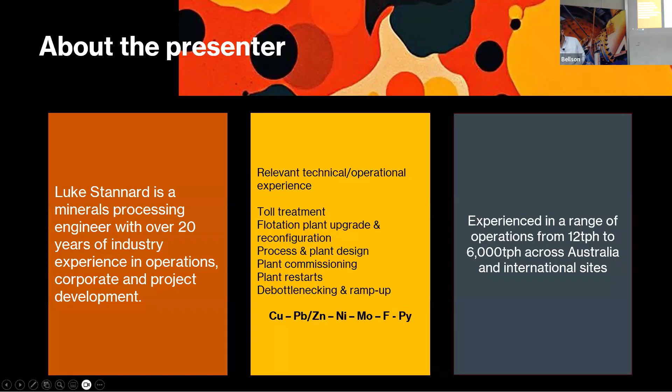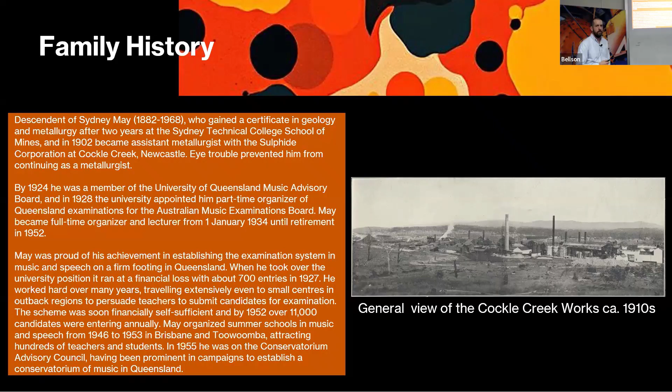And again, I appreciate the opportunity to come and talk here today. A bit of family history is that there was briefly a metallurgist in the family before ending up with an eye injury, but later went on to grow the music department at the University of Queensland. So it's held in high regard, the university here, and I really appreciate an opportunity to give back myself today.

So on the Tennant Creek area where we're working at the moment, there is basically the one group at the moment, Pan-African Resources. They recently acquired the Tennant Creek mining group, and they have an agreement with Emmerson Resources, and they have commissioned a plant this year that will treat a lot of the gold deposits of that region.

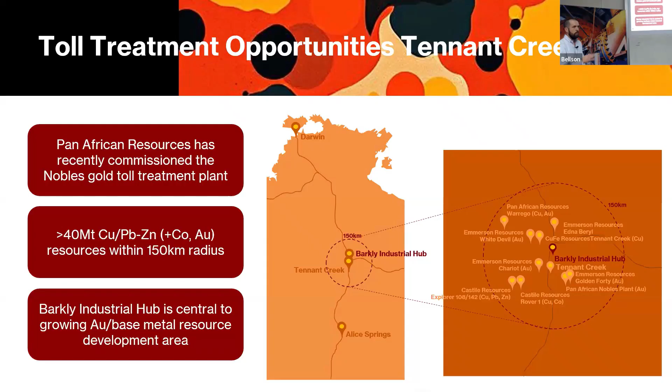Outside of those gold deposits, there's about 40 million tonnes of base metal resources within a 150-kilometre radius. And the genesis of this project, there's a gentleman who owns the Barkly Industrial Hub, situated right in the middle of that area. So this site was originally an abattoir. It's been leased out to industrial clients over the years, rehabilitated and upgraded to be an industrial site. The vision for the site is that it will become a circular economy focused industrial hub that draws on the mineral wealth of the Tennant Creek region.

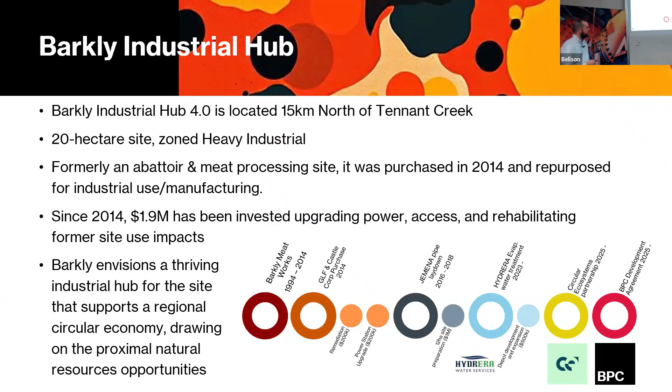And so right now, there's 3 of us working there. There's a group, Hydrera, who treat fracking water from the region. There's Circular Ecosystems, who's I guess sitting at the top layer, making sure we generate value between the groups that work at the site. So the vision for that site is aligning with the Northern Territory government's economic strategies, and it's not particularly unusual. It's the usual: create jobs where we can and leverage infrastructure that has been installed over the years.

From a mining sense, in that region, what ended up becoming part of Newmont or Normandy was Peko Mines, and they had a large area across that Tennant Creek region, uncovered a lot of copper, gold, and bismuth resources, and produced a significant amount of copper and gold over the years. Ran for I think near on 40 years, and since that time, those assets have been all split up and sold off, and there's still some tailings that have been acquired through various groups and partially retreated, and I guess remain as a legacy item to deal with in time.

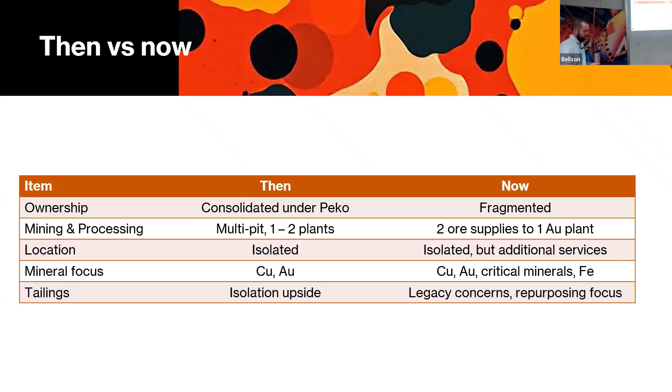There are groups that are open to other commodities. So there's been discoveries of rare earths and other critical minerals in the area. So designing anew, you can bring in some other considerations. So I guess going into the offer that was made to stand up a toll treatment plant here at this site, we started to think about how to pull this together, and the framework that we've worked through.

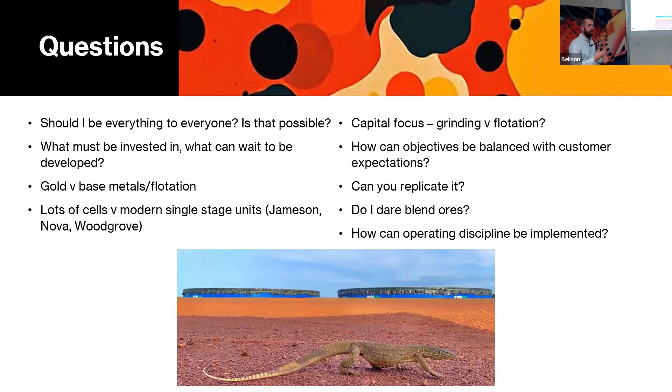I guess there's a few questions here that we were asking ourselves. I think some of the important things that we're mindful of is, there's been basically a generation since it was last operated. So what new learnings can we bring in? What new technologies can we leverage now? And importantly, if we can do this now, how do we replicate this so that we can take this elsewhere? That has sort of led to a framework under which we move forward through into design.

The intent is to have something that would be classed as medium-sized, and should service most of the known resources at this time. That's the only way we can really approach it. One of the items that we want to try and achieve is to make sure that we have modular design factored in, so that there's particular areas that might benefit from being able to move parts or the whole plant to a site for a short period of time or campaign period, and then come back.

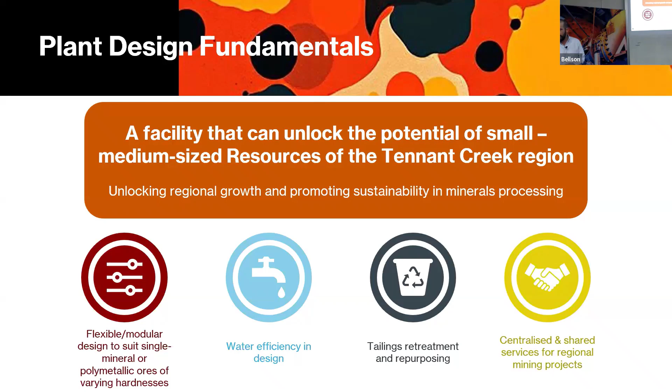And obviously, because of the fragmented relationship, we need to build something that can service as many as possible. Groups that are maybe working in a similar space in the market at the moment: you have Coda Minerals in South Australia, who probably is more set up like Peko, where they have ownership of the sites, and their intent is to have one facility that can treat that material. ANAX is probably more similar to what we're doing, where there's a multitude of different deposit types. They have a site that has an old SX plant, so their intent is to build on a flotation plant and then have the benefit of being able to treat oxide and sulfide material.

So things that we're working through, after considering what is happening in the market, is looking for opportunities to bring in ore sorting, and also modern comminution and flotation technologies. We'd be focused on getting the plant and establishing that before trying to drive through ore ownership and prioritizing that. The main thing is setting up a facility that unlocks value in the region.

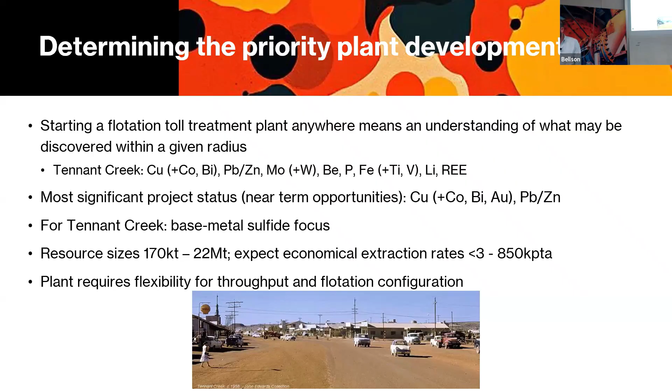So across the region, you've got resources from as small as 200,000 tons up to 22 million tons. And I guess we were thinking that we need to be somewhere between 300,000 and 850,000 tons per annum, and probably towards that higher end, as some of the groups have updated their resources lately. And because there is quite a big range on those numbers, we need to be thinking about flexibility. What equipment we choose needs to be flexible for being partially filled in one part of the plant and full capacity at other parts. So that remains a driver.

And at this point, I've reflected on some work that I've done previously for a client who had a tails treatment plant. They were treating tails material, producing a lead and a zinc concentrate, with intent to then retreat the material again and recover pyrite material. And there was a lot of rehandling there, but that was driven by a desire to spend minimal capital to maintain existing plant, and they had limited capacity to move material on their transport corridor. So to recover all the minerals at once meant that they'd end up with a bottleneck. So they were treating and retreating.

We were working with them to try to find a way to spend as little capital as possible and keep this plant going for another 10, 15 years to get through this recycling of material. They would be taking all the acid generating tails by removing the pyrite, leaving tails that could be capped safely. And they were also finding opportunities to perhaps restart little parts of the mine and put in fresh material as well.

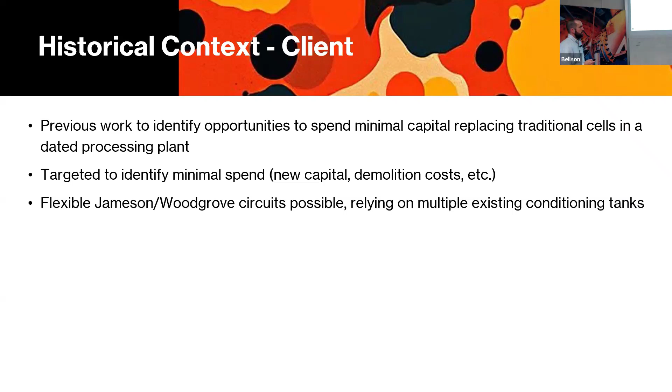So the work that we did there, what we found from that is the easiest thing to do was replacing their aging flotation plant with just a handful of cells, with both Jameson cells or Woodgrove cells looking like they could be a minimal spend and replace solution where they would go from 80 odd cells in the plant down to about 6. And by choosing the right size cells, we could configure for different feeds.

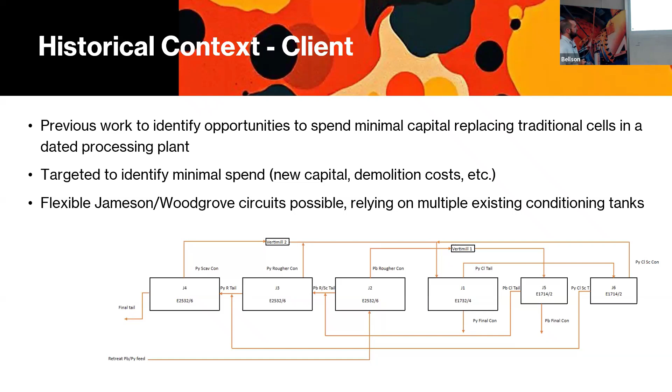And what unlocked this was the fact that it was already a large, complicated circuit that had lots of conditioning cells, transfer pumps and transfer pump options. So we could utilize them and just replace the cells only to basically keep that operation going. So that has driven the thinking on the flotation end.

On the comminution side, this material in the region, even with publicly available information on the ores, looks very similar to days gone by. The material was ground to 75 microns. Then they would have rougher scavenging, some regrind, and that would be down to about 38 micron, and then produce about a 25-26% copper concentrate. So there's certainly no ore sorting information, nothing of relevance. That's work to be done.

I guess from a modern lens, this sort of plant, you might look at a 2-stage crush SAG ball or a 3-stage crush with ball mill to do the same sort of thing. Would you have 2-stage crush, a HPGR and a tower mill? That sort of looks challenging on the hardness numbers, but still for consideration.

Can we reduce grinding requirements through putting in HydroFloat? That's a consideration that we've leaned towards. Again, done some work on the Cadia HydroFloat installation and seen what that can unlock there. So that's driven a lot of plant design thinking.

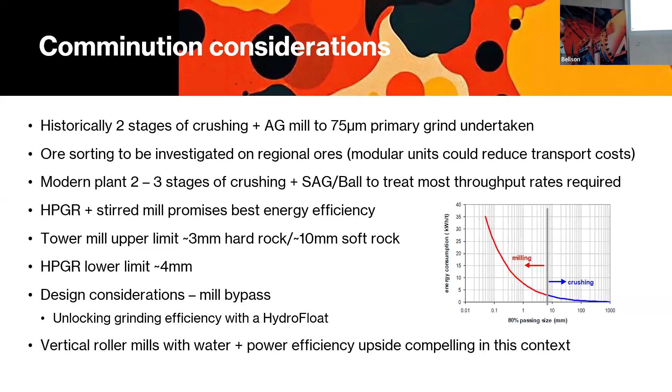So what I understand now is that there's been a bit of work in this space, so I'll just touch on these pretty quickly.

More recently, Oz Minerals looked at inclusion of vertical roller mills for the West Musgrave project, and that was seen as a way to basically do all your comminution during the day using renewable energy generated, and then they would float 24/7 downstream, with a fine ore bin in between.

In the VRM space, from a manufacturer point of view, you've got Loesche, who are looking at the vertical roller mill with hydrofloat and what can be unlocked there. There's Gebrüder Pfeiffer, also another German group, who are looking at good combinations of ore sorting and vertical roller mills. So there's a bit of work going on in this space that we've relied on for our plant design.

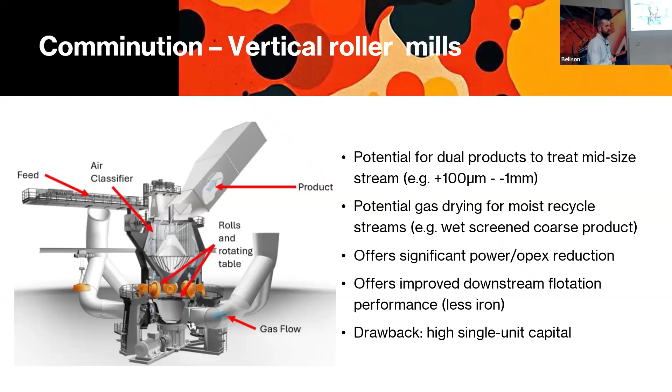In other applications, I think Dean David, who's spoken here, not about this, but their work with Grange Resources, they feel like the vertical roller mill has unlocked that project. That was a project that had power and water constraints, and with what test work had offered for that, they think that project can move ahead.

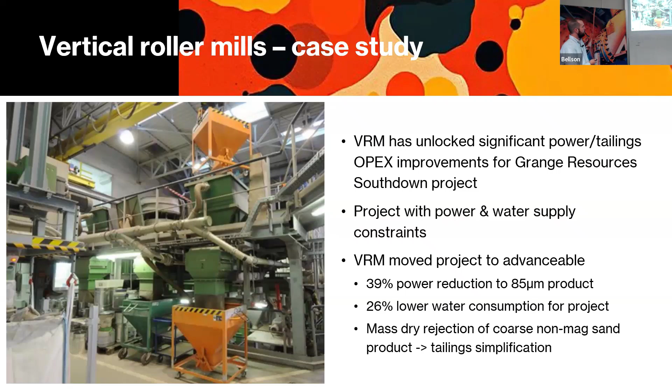So, as I mentioned before, in the past on that lead zinc recycle plant, the learnings from that are that the use of basic conditioning tanks and transfer pumps, and adding flexibility with those - they're low capital items - can enable you to use less flotation equipment, certainly with some of the more modern cells. We're looking to try and replicate that work again, reduce the amount of cells that you use, but build optionality.

Fortunately, there looks to be a sort of long lead of copper ores, so it should be a pretty basic circuit. We might need to put on a few cells for bismuth concentrates from some materials. But then in time, if the lead zinc ores of the region come on, then there's another couple of cells that might be built in.

Again, we have sort of built the circuit around there being the hydrofloat in there to reduce the equipment size that we need downstream of that. That looks like it drops out both the number of cells required and the size of capital spend downstream.

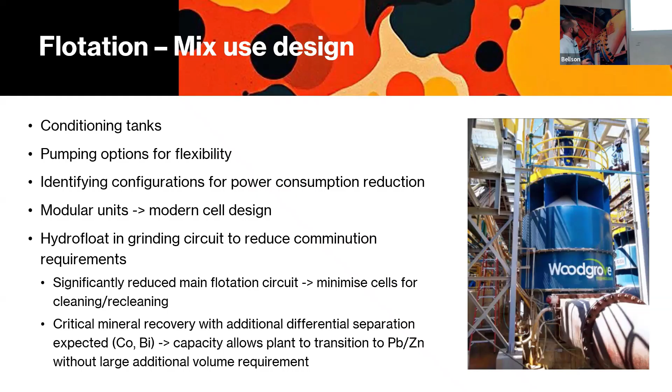Again, this is obviously for those who don't have much knowledge of the hydrofloat. It's a flotation cell that focuses on the coarser particles, and what they offer is high mass rejection. At that coarse size, they can recover a lot of low liberation material.

These are being typically used at the moment as scavengers on the back of flotation circuits to recover coarse composite material, and is unlocking upside on throughput on plants. And so far there's only the one example of it being used in a grinding circuit to reject coarse barren material early.

And some of the drawbacks for that at the moment is that it has a requirement to separate material before it. So it's not just a float cell. It comes with a requirement for maybe cycloning, or they use cross flow separators with those.

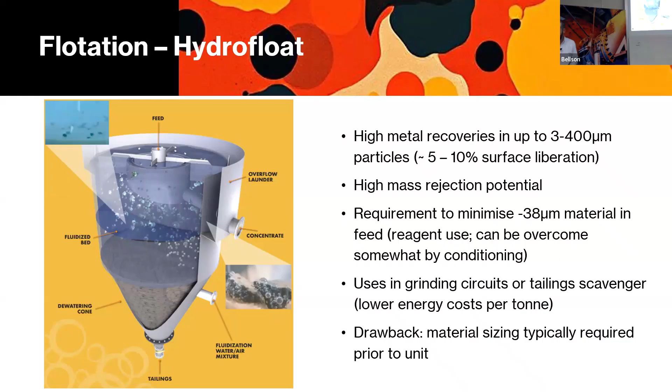Some of the successes they've had: one of the earlier installations of the HydroFloat was at a phosphate operation in the US. They had an aging plant and wanted to upgrade. The HydroFloats were brought in because there was a large amount of material in the coarse fraction that had low recovery. What the HydroFloat unlocked for this Mosaic operation was an ability to recover the coarse phosphate particles without more grinding, giving them a significant upgrade in throughput through the inclusion of the HydroFloat cells.

And with an upside that they dropped out a lot of collector use at the same time, so they got a pretty good OpEx reduction.

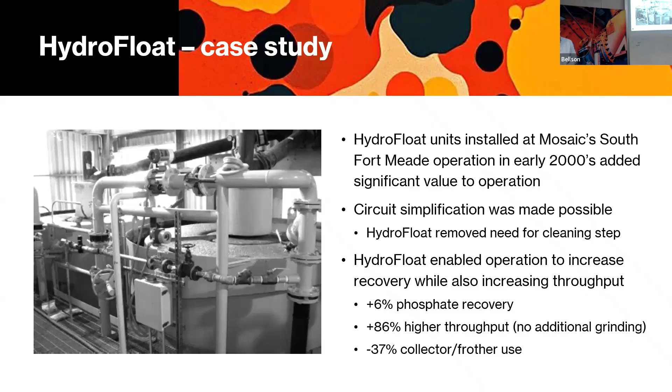So we've looked at the different equipment across what it can do at different size ranges, and taken the information available on these ore types and gone through a couple of iterations on plant design. What has dropped out from that is pretty convenient in terms of having a simple circuit.

Some of the things unlocking that are the requirements in between preparing feed for a HydroFloat and then what you can do to take that material down to liberation size, around 38 micron. That difference in particle size can be handled in a single step by a stirred mill. So the largest simplification we see is basically having a HydroFloat recover material that's ground in one stage through to liberation size, followed by a very simple set of cleaning cells.

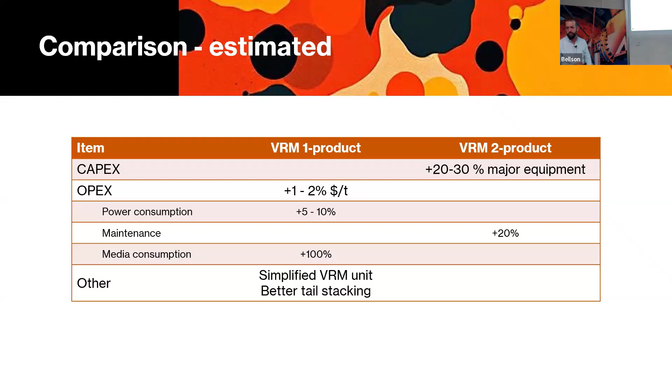So that's all the theory and thinking around our proposed circuit at the moment. Our next step is to really test this, and we'll go through all the usual motions of trade-off studies and piloting where we can to test this.

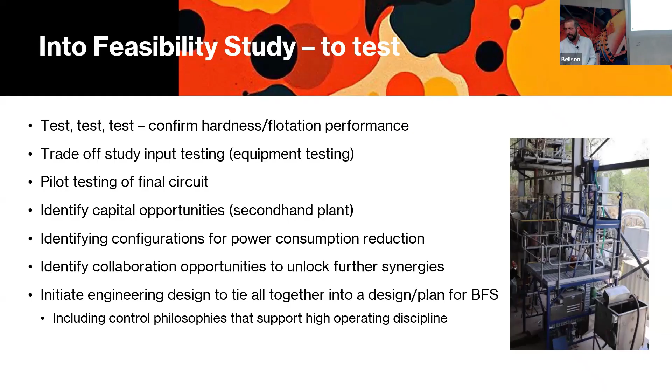As much as we've leaned one way with the design, ultimately what's available and what capital restrictions we might have might drive changes in design, but where we have the opportunity to push the boundaries with that design, we'll keep pursuing that. And so that's about it.

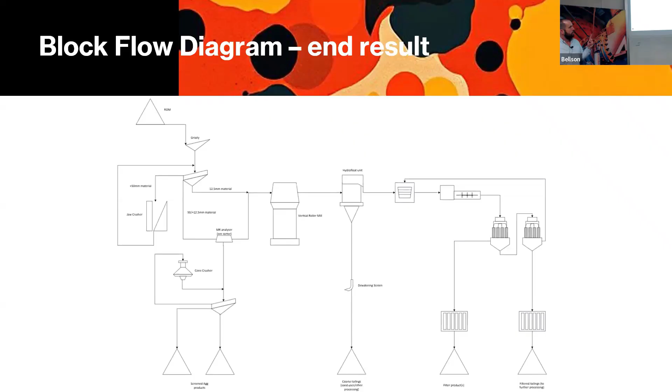Yeah, I guess the biggest one is between these two configurations. If it all works really nicely, well that's great. But I think this circuit configuration is going to lend more to reasonable variability between size requirements, because here you're just trying to reject whatever coarse barren material you can through the HydroFloat. But if it needs to be 75 or 106 micron for your first stage flotation, I think that configuration is likely to be better for that.

So what I'm asking is, do you have a fixed system for assessment for how that's going to happen? I guess it will be testing these configurations and having to...

At full scale? Well, or piloting them in the facilities that are available. I think you need to come and have a chat with us about that, is what I'm saying. Well, that's what I found out. It's good that I came. Yeah, okay.

No worries, my name's Andrew, working comms. My question is about transport costs and availability. Is that going to be a bottleneck, or does that capacity already exist? And if it already exists, how do you tap into that?

With the Pan-African guys moving into the region, it's maybe a bit of 'build it and they will come.' There's a group, MMS, that have turned up supporting them with transport. Making some of these parts modular is an opportunity to take a part around to your sites, sort it at site, and then just take product to the mill, reducing that reliance on transport as well.

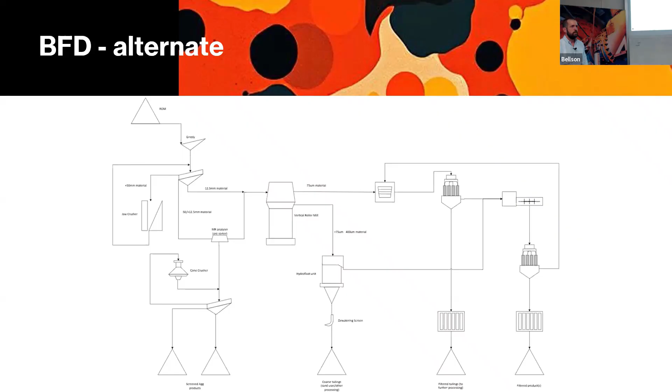It's a transport logistics related question too. I was wondering, of the network of deposits around there that you're looking at as feed sources, are there any on the train line to the north that could utilise that coming straight in? Mount Isa is on the train line, but the trains going back from Townsville to Mount Isa are basically empty.

So if there's empty capacity inbound to Tennant Creek, there's a huge opportunity for cost saving there, materials handling costs notwithstanding. Part of what we've explored is the return leg going north and south—there's a lot of spare capacity, so at least bringing equipment in and finding opportunities to backload. We've seen that, but haven't looked further afield yet.

Trucking ore around is problematic depending on how coarse it is. If you've crushed it before putting it on trucks it's fine, but loading coarse freshly blasted ore into trucks and trying to truck it around damages the trucks, and it can move around and tip things over unexpectedly. That's a potential issue. Some of the questions we've had overlap, and ideally as a toll treater you provide a service, but if you can influence your customer, that's great, particularly with things like sticking big rocks on trucks. That's where being able to sort at a site can hopefully influence better outcomes.